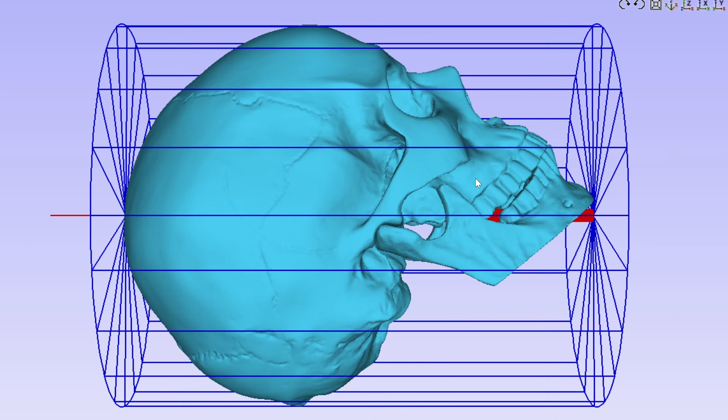The 3 things we're going to teach you in this tutorial are the limits of rotary carving, how to import and position your 3D model,

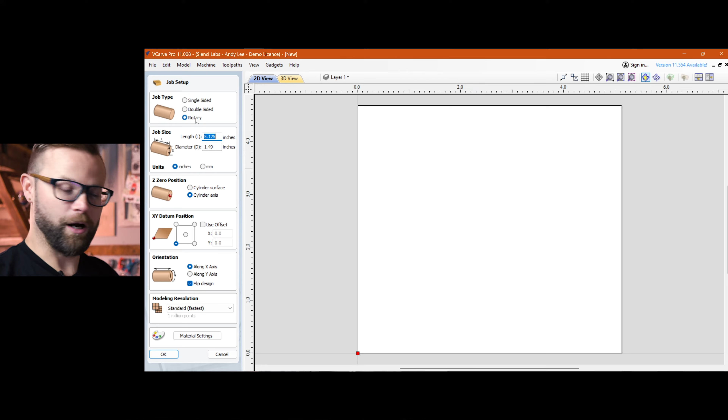First things first, we're going to create a new file. I'm just going to whip through this since you're probably far enough along - even if just starting out with Vortex, you'll have an idea of what's going on. We are going to do rotary carving instead of single or double-sided. That's fairly self-explanatory. The length of your material and your diameter is going to be determined by how big your material is, which is why I have 1.49 in here. When we talk about rotary surfacing, that will really dial that in.

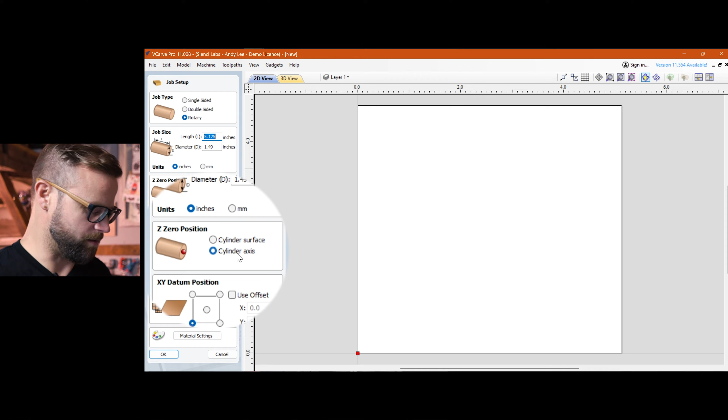Your Z0 position, we recommend it being on the cylinder axis - that's the middle of your material, because if you surface to the outside of it and that changes, you've lost your Z0. Your XY datum, bottom left, is normal. Your orientation is on the X-axis if you set your Vortex up that way, or on the Y-axis if you've set it up that way on your machine. For flip design, just leave it turned on, because if you mess with those settings, it will automatically flip the design for you. So that's document setup in a nutshell.

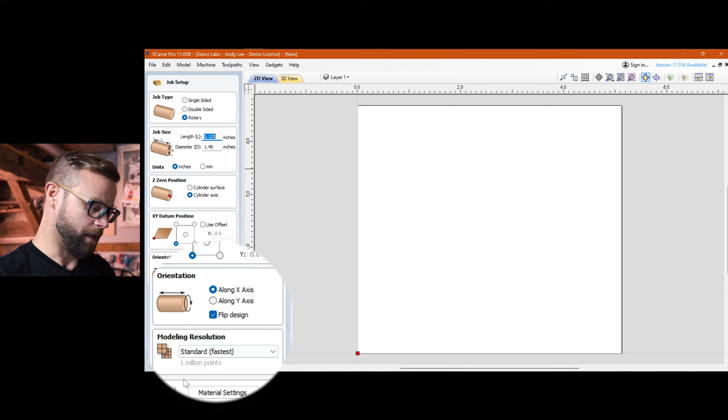Next, we are just going to go to our modeling tab. We are going to import a component like we always do, and as we will provide in the link to all the files, there is a skull file in there. So if you want to follow along with the skull, click on that guy. It's going to bring up the usual 3D import dialog with a couple of key changes.

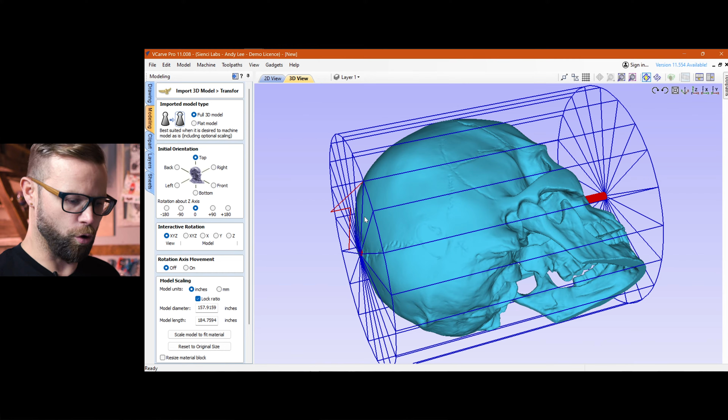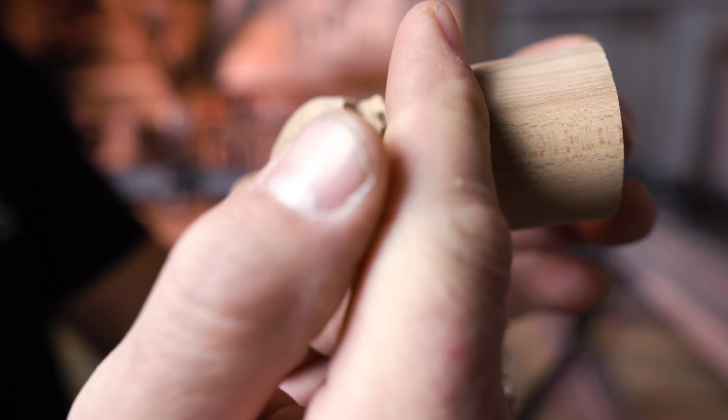And this brings up the first limit of rotary carving that we alluded to in the opening, and that is something called overhangs. It's going to be a little bit tricky to see - there's a little tiny bit underneath the skull, the chin area, that can't get carved out. That's like an overhang, so the rotary axis can't get down and underneath that area. It will only be able to carve straight down.

Limit number 1. The easiest way to fix this or get around it is to just rotate our skull so that it has the best orientation possible for the best carving. So if this was our rotary and it's carving this way, you can see that the skull has been rotated a little bit.

If this came in as it was actually imported, the skull would be like this, and the axis on X would be going right into the forehead or the nose area, and you'd lose all those important details. So the way we're going to get around that, because I don't really care about this side of the chin or the back side of the jaw, is to just rotate it into a position that keeps the good details and hides the ugly ones.

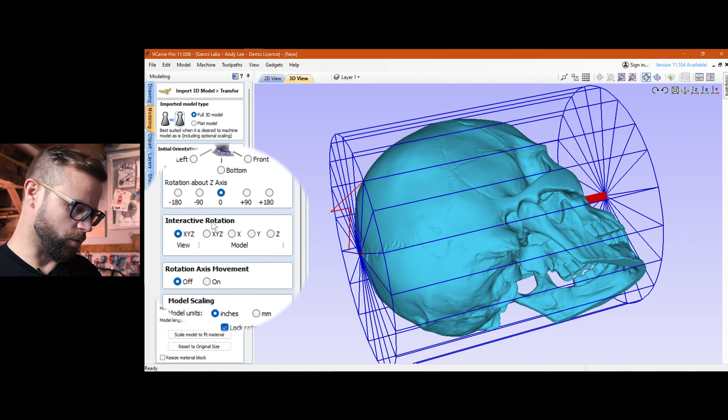We have a full 3D model. Our orientation is still top. We're going to turn our interactive rotation to the Z axis. You can see on our screen here, that's what I was just talking about. The X axis will be going through the nose as it is of the skull and out the back, which the back's fine, but the front you're gonna lose that detail, or you'd have to monkey with it after.

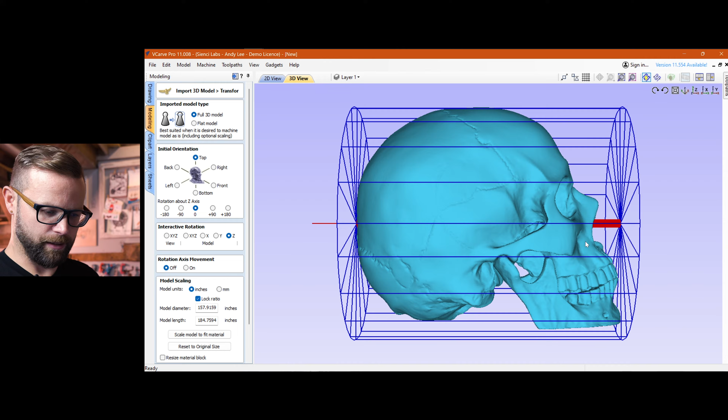By changing the interactive rotation to Z, I can now literally just click on the model and rotate it up, and it will lag a little bit, but you can see it's starting to, look at that! First time I got it. So that red axis there is showing what your X is going to look like, and it's right basically in the same spot as this one is. It's going to go underneath the jaw. We're not going to lose any important details, and we're going to have all the stuff that we do care about front and center.

Done. Wow, that was easy. That never happens. My model units are whatever you're comfortable with.

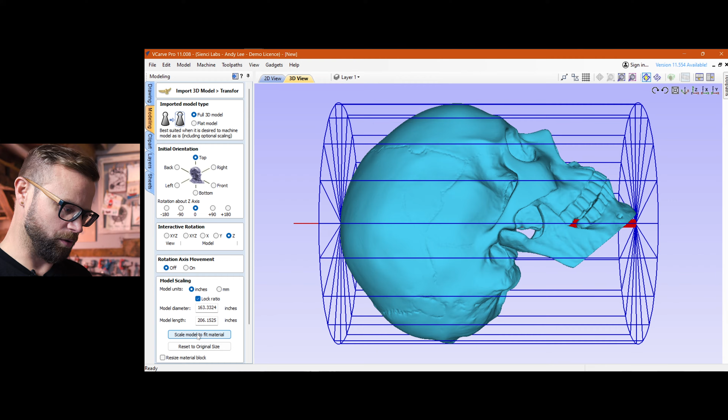The model diameter is obviously incorrect, so we're going to scale our model to fit material. Ta-da! And you can see there's my material length of 5 and 1/8, this guy, and 1.5 inches round ballpark. That is all we needed to do to import and position the 3D model to optimize it for the best carving possible.

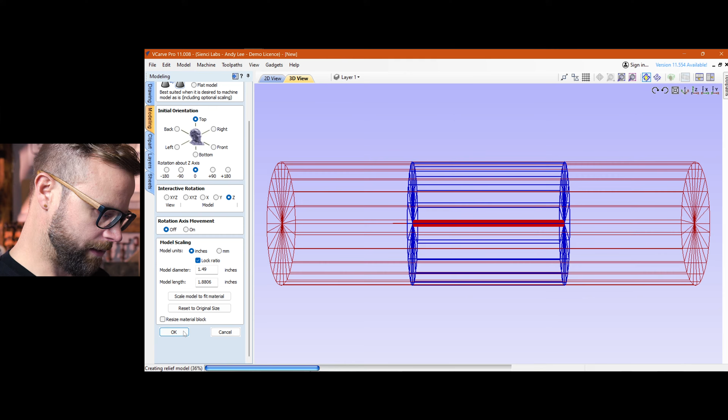We have our model positioned. We're going to hit OK, click, and you'll see that it now imports into 2D space. This is going to look a little bit, not new, but if you did project number 1, you'll already understand that this is basically our cylinder stretched out and unwrapped. It looks a little funky, but you can start to see the bottom of the jaw here. There's the eyes, forehead, and things of that nature.

So the second limitation of rotary carving is that it can't go past the center point of your model. So on this cylinder, it can't go past center because it's going to chop stuff off and it's not going to work. That's just limitation number 2 to be aware of when you're carving these things and rotating and having your position in place.

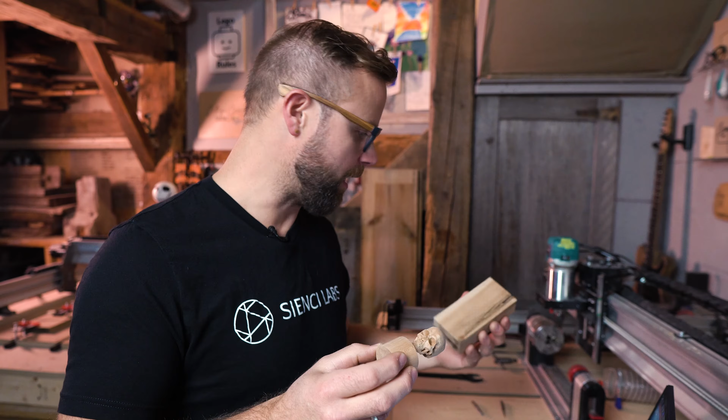So we're actually going to add 3 different tabs to this particular cylinder. I wish I had a working example sitting there, but you can see here's cylinder number 1, tab number 1. We're gonna have tab number 2 way up here, and then we've got a third one up the middle there, and that's so that we can have the skull looking up and elevated a little bit. You don't need this third one, you could just have the model joined right to your bottom tab, but then it's a different dynamic. So depending on your model, for our particular case, we're gonna add 3, and we're gonna do that right now.

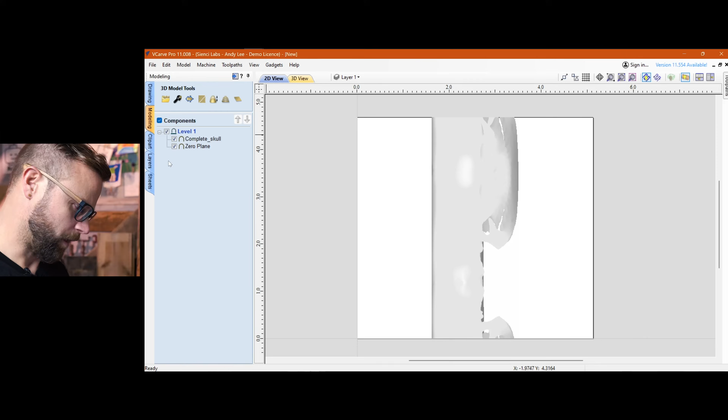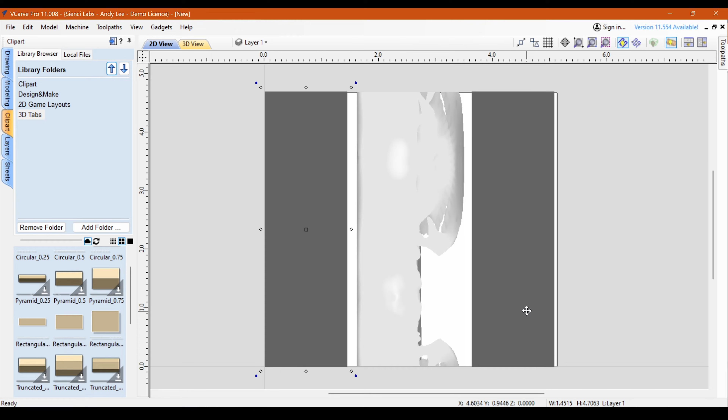So you are going to go to your clip art tab, your 3D tabs, and you're just gonna grab any old rectangle that you want because it doesn't matter. We're gonna mess with the size. You can double click or you can drag and drop. So for the top tab, very simply, we are just going to position it way up there. And if you hold Alt, you'll be able to distort this however you like. So for me, I'm going to stretch it out to there. And then I'm just going to hold Alt and Control and drag one down to the bottom. 2 out of 3 tabs, done, easy peasy.

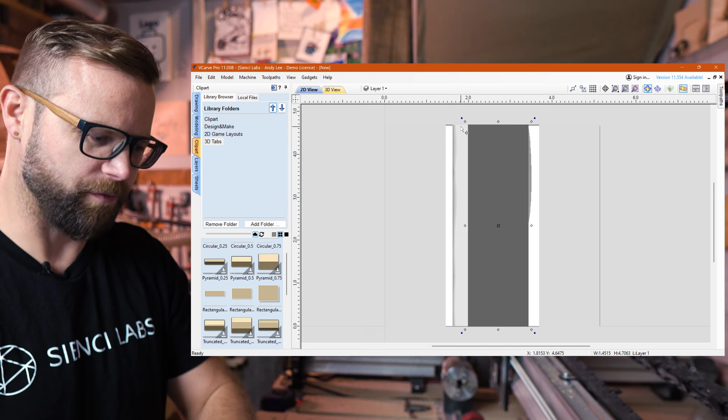This third one's a little bit tricky because it starts to mess with your workspace, but you'll understand it once we go through it. So you can Alt and Control drag again. You have another 3D tab, but this one we're going to cover the entire document work size with. It's going to block all your stuff and you won't be able to see, but you'll understand in just a second why we're doing it.

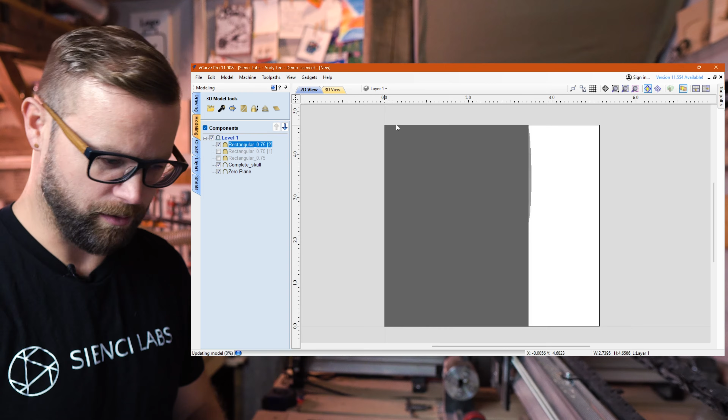Tip number one: if you go over to your modeling tab, the deselected tabs we've already created are in the way. You can check them off to see your whole workspace. Now we're going to take that third tab, hold Alt so we can distort it, and drag it across the entire work surface.

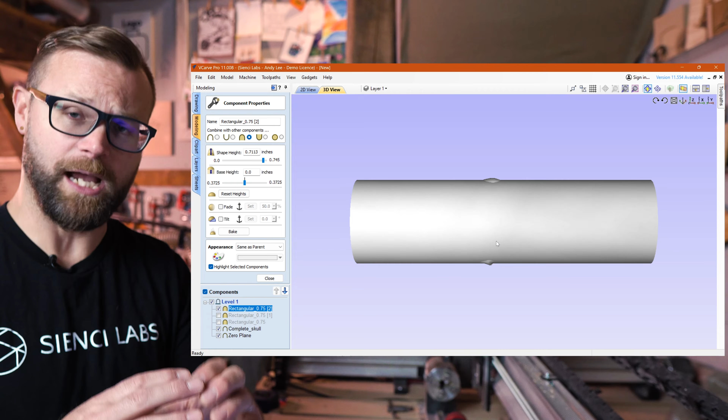Now you're saying, Scott, I'm just looking at a gray box instead of my model - yes, you are. So double click on that new tab, go to your 3D view, change your view, and you'll see that tab is the size of your stock. That's not helpful because it's burying your model in it.

But if you just change your shape height, right here, using the arrows or your mouse, you'll start to see your model - come on, show yourself. Aha! You can start to see that your model pops out.

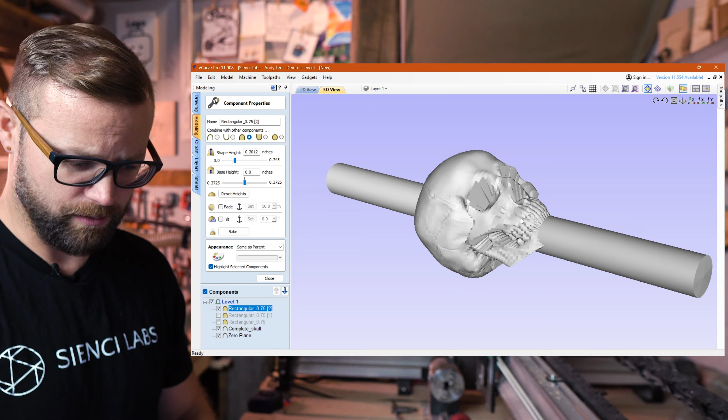So you set that as thick as you want so it's not distorting anything, not in the way. Right about there is pretty good. It's still going to get a little bit of that jawline, so I'm going to leave it there because honestly, I'm not that worried about it - I know I can sand it out if I want to.

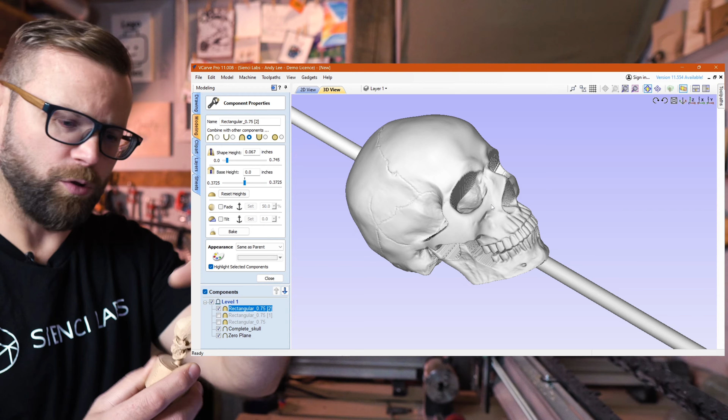If you're not happy with your model position at this point, if you want it more rotated or want to change it, you can always go back to your modeling tab. Right click on your skull and re-import it, changing the orientation just like you did the first time. Nothing gets lost, you're just changing it.

So let's actually do that because I don't like the way that looks. Go back to re-import, change the interactive to Z again, and I'm going to zoom in just a little bit because I don't want it to be quite...

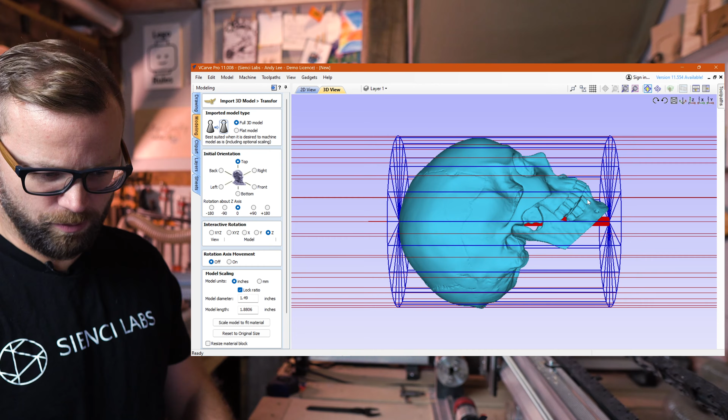So again, this is where those overhangs are going to be a factor. If you go to a side view, there will be a line that comes straight down off of the bottom of that jaw.

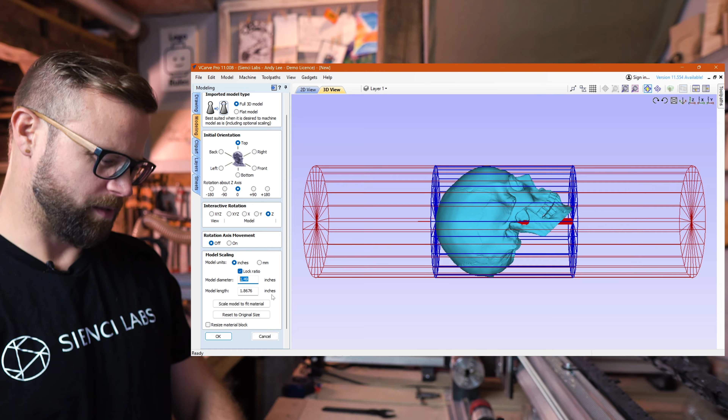I'm okay with it. Scale is incorrect, so we'll hit scale model to fit material again. And if I'm being honest, I'm going to make that a little bit smaller - I didn't do that the first time, but just a tiny bit smaller so it doesn't catch the edge of the material. I probably should have said that the first time, sorry.

Here we are, back in our 3D space, and you can see that overhang I was just talking about. You're going to get a little bit of this because the bit can't carve down through there, but I'm okay with how that looks - it's not going to hurt the aesthetic.

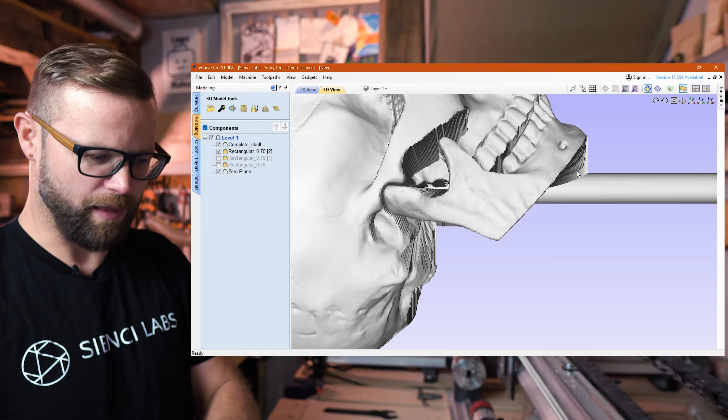That's it for 3D tabs. Now that we have our 3D tabs in here and our model's positioned the way we like it, you can change the height of those 3D tabs if you want to, but the way I'm going to set up the model with the toolpaths, we're not even going to actually carve those out. So they'll be left in place when it's carving, which is fantastic because it doesn't waste time carving. And we're going to talk about toolpaths right now.

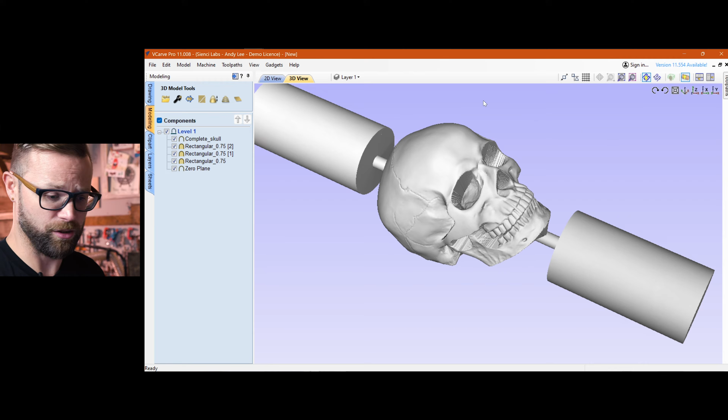So this is actually a really good segue. Fire up our tab, we'll pin it in place. We are going to use a quarter inch upcut to do the rotary surfacing as well as the rough pass on the skull. And then we're going to use a quarter inch tapered ball nose to do the fine details.

If you're not familiar with roughing and finishing passes, the roughing pass will just use a bigger bit. It'll remove more material faster so you can get the final pass done sooner and easier. It basically saves wear and tear on your bits and saves time overall.

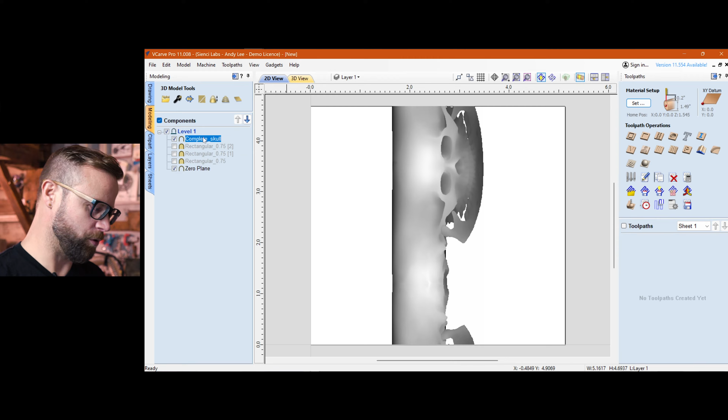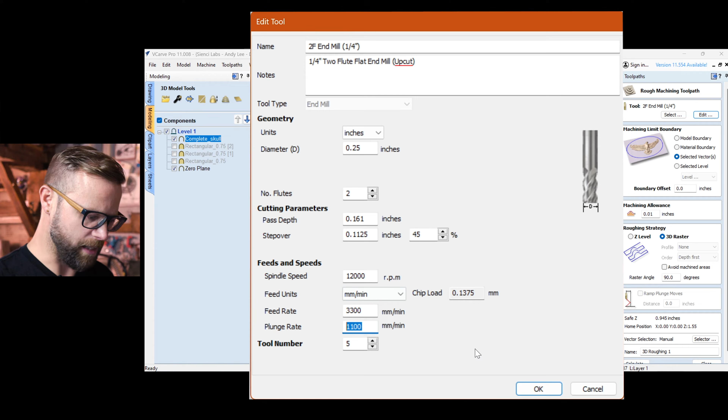I'll show you my settings. Here they are. The only thing I really tweaked was my feed and my plunge rate. Everything else I left as is, and it chewed through this fairly quickly. So we'll leave those as is. I'm good with that. Boom. Boundary offset, make sure that's set to 0 because that can mess with your stuff.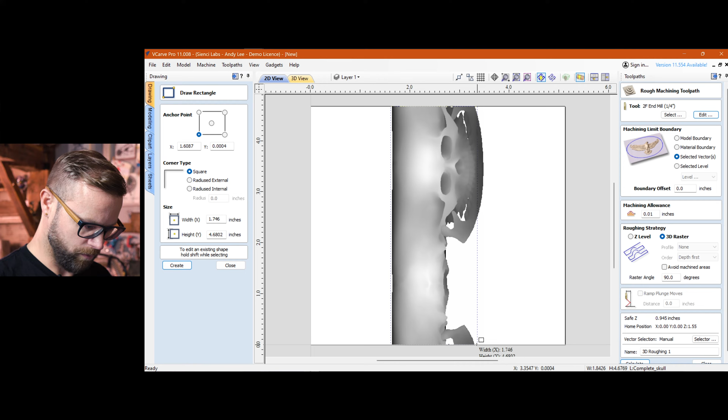This is where I said earlier, I'm not going to worry about carving out my tabs because I'm going to use the wonderful selected vector. So I'm just going to draw a simple rectangle, just around the shape of the skull. Get over there, just past, just past, just past. The reason I'm doing this is, while this is doing its carving, instead of carving these out and messing with this and wasting my time, I'm basically going to tell it, only carve what's in between here and here. It's going to save time and it doesn't change the final outcome, so I'm all about saving time.

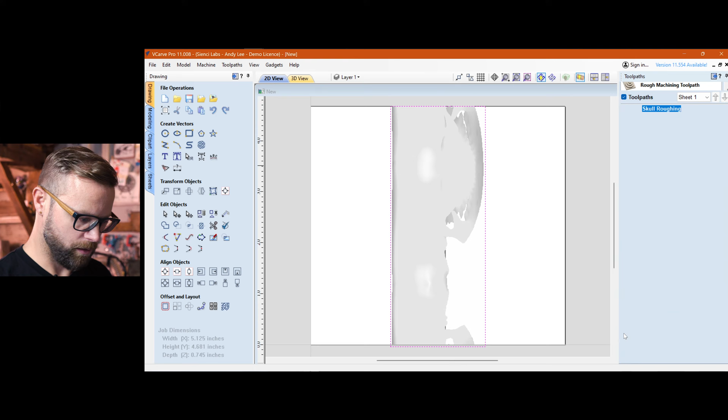You have your model selected. You are going to hit selected vector. You are going to change your roughing strategy to 3D raster and change your raster angle to either 90 or 270. That just makes sure it's carving properly and making everything look smooth and fancy. I'm going to change the name to skull roughing, and then hit calculate. Then we can preview our selected toolpath and you will see the rough formation of our skull. Yay.

There it is. So you can see it doesn't touch the tabs. It only hits that stuff in between that selected vector. It saves time. That's marvelous. We'll go back to our 2D view.

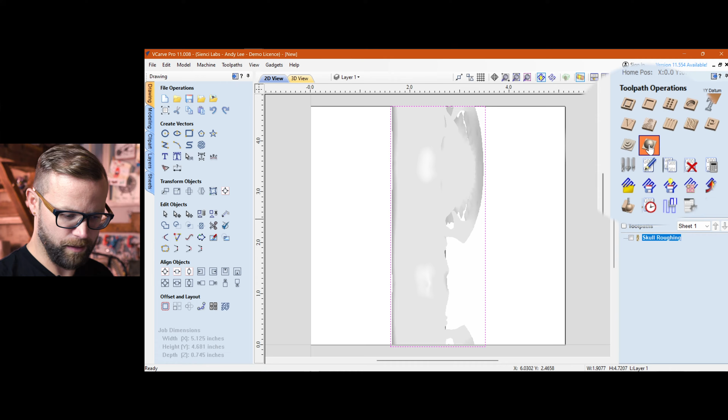We'll keep everything selected the way it is, and we will go and make a 3D finishing toolpath. We use the 1/4 inch tapered ball nose, just like I said. I'll show you my settings there too. And again, the feed and speed rate - this is a different calculation method than for normal carving.

So we're recommending just leaving these settings as they are. I've literally carved 2 or 3 of these out now. They work just fine and dandy on hardwood or softwood. So if you want to mess with them, go ahead, but what we have in here will work just fine.

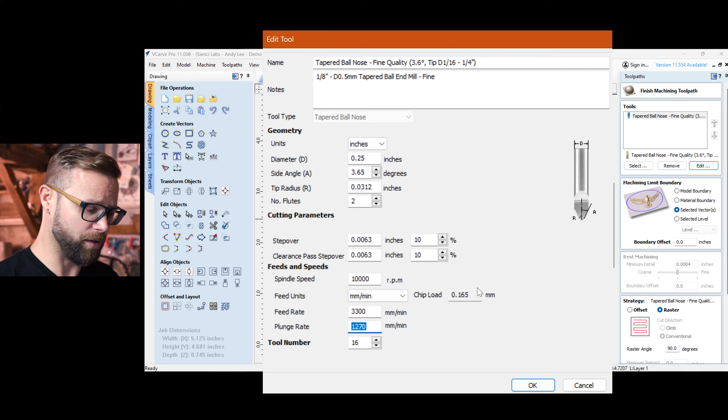So we're going to say okay, and we're still going to use our selected vector. Our boundary offset is still going to be 0. Our raster is at 90, and we are going to call this skull finish. We are going to hit calculate. This one's going to take a little tiny bit longer. Then we will preview that selected toolpath and you'll see it scribbling along and doing its thing.

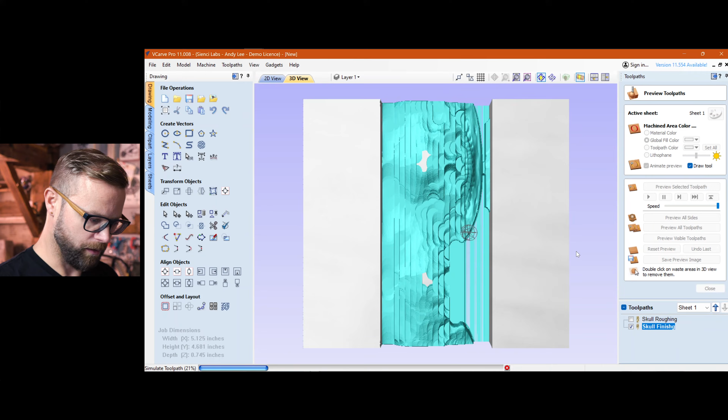Ta-da! Finishing toolpath. Now, because there's a little more information here, you'll see that maybe it takes a second longer to generate that preview. Overall, not a big deal.

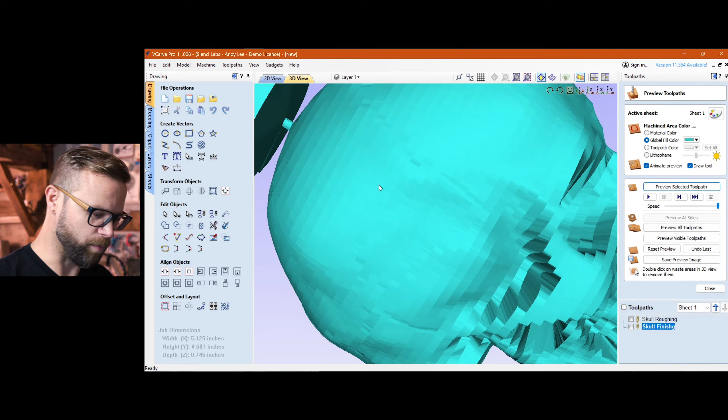Now, I'm already seeing an issue though, where my tab is - I'm gonna have to fix that because that looks far too skinny to me and I think that's going to break. Maybe it's not. Actually, I have a file open already, so I'm just gonna check that one because why not? So I'm gonna preview these two and see what happens, just to double check because I've already done this project and I want to make sure I'm giving you guys good information.

Huh? That's not what it's supposed to look like. Alrighty, so the reason my preview is messed up, and this is 100% user error, was I had all of my tabs turned off. It's gonna make a difference.

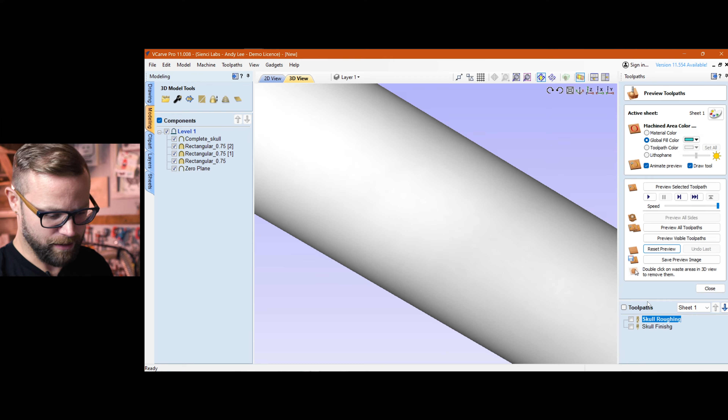I'm going to recalculate just to make sure everybody's happy. Nothing else is going to change, however my tabs are going to do what they're supposed to do. So here we go, and I just realized that I spelled finishing wrong. Finish - whew, oh, because I had just finished. There we go. Well, it's spelled right now.

Whew, these short tutorials are killing me. And now we are going to preview. You know what? I'll just do the roughing one so you can see what's going on. Preview the selected one.

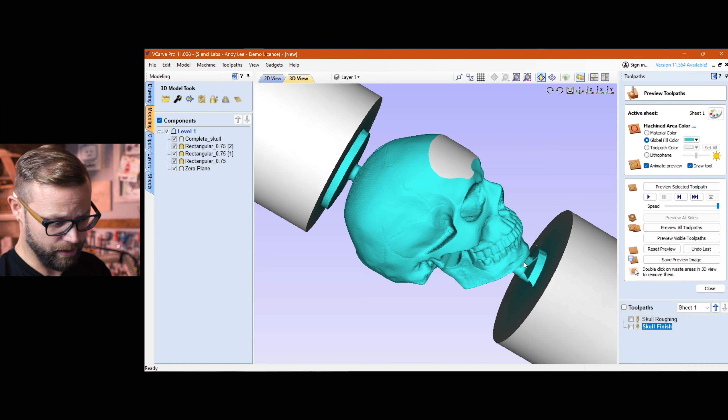Again, tabs at the top and the bottom are going to be great. There we go. That looks basically the same, but the finish pass is now going to look much better than it did. It's going to look the same, but that little spindle at the top will not be - aha, it's not so skinny. It's going to be chunky, and it's going to hold it on there. It's going to hold it on here, and that's it for your creation of toolpaths.

We're happy with our toolpaths. Our settings are dialed in. This is hopefully easy to follow along with. There's not really a lot of crazy settings going on. So we're just going to go over and we are going to save our toolpaths.

If you have not downloaded the Vortex post-processor, we'll put a link in the description. Make sure you get that because otherwise you literally can't use this thing. That's the only difference between a normal carving job and the rotary is that your post-processor will be, instead of Grbl, whichever one you like, it's going to be Vortex A-axis right there. Click on it. Same thing, visible toolpaths to one file.

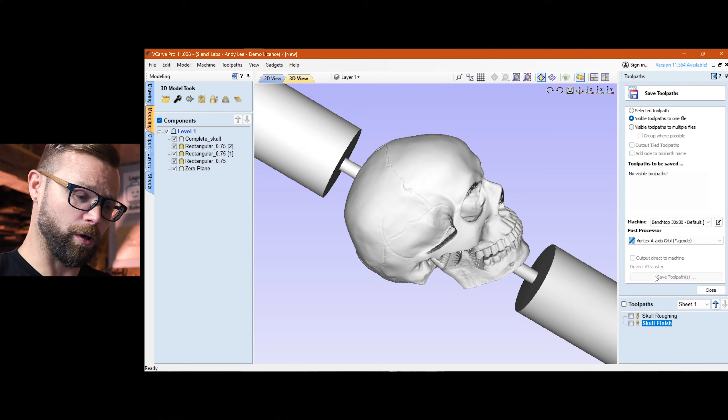Johan does talk about tool changes in his written tutorial. I'm not going to go there. I'm keeping it simple. So I'm literally going to select my roughing pass. I'm going to save it to my gcode folder, and they're already in there. And Louis is going to yell at me that I don't actually hit save.

So I'm going to make a new folder. I'm going to call it X. And I'm going to save my skull roughing in there. And I'm going to deselect and save my skull finish in the same folder. So you actually see me click save because we don't want people thinking that we're not actually clicking the button. We're going to hit close.

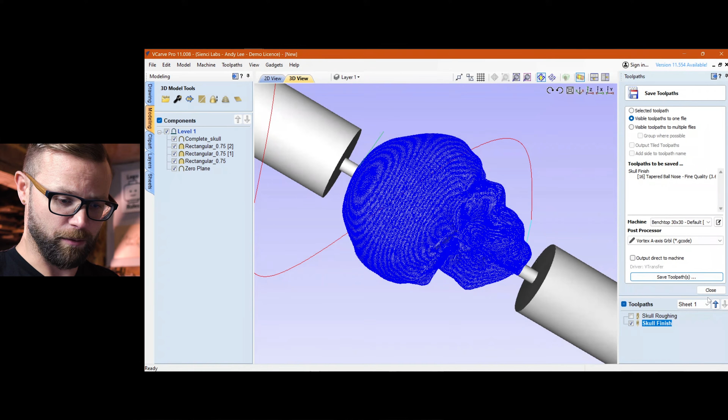We're going to save our file because nobody likes losing their file. It's going to go up here and I will call this skull tutorial. And I spelled it right. Hit enter. VCarve is done. It's that easy. We are going to start loading our files in gSender and doing that in just a quick second, but before we do that, we have to turn this rectangle into a cylinder.

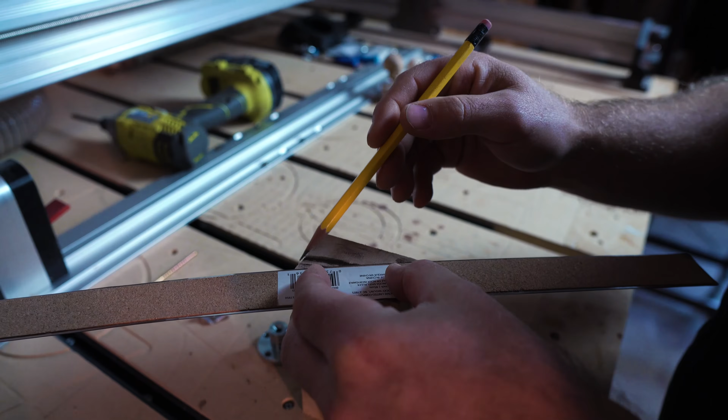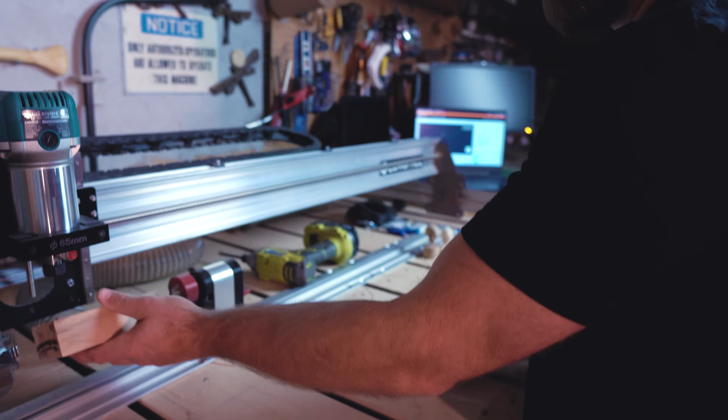So the easy peasy way of doing that is to find the corners of your piece, draw a line from corner to opposite corner again. There we go. You have your center point now, right about there. Because this piece of material is obviously too big to fit in this chuck set of jaws or the other one, we're going to use this handy dandy little plate attachment.

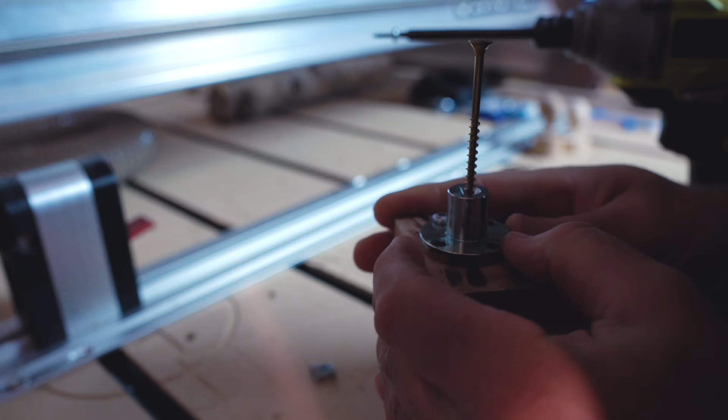The easiest way to do this, and again, you don't need to do this, is you can just drop a screw through the middle, line it up to the middle of your X, and that tells you where the center of this needs to be. I'm not gonna lie, I don't do that very often. I eyeball it because this thing is gonna turn that into what we need it to be. Drop in a couple of screws. If you see it come off center, then just kind of get it close enough. There we go. Yeah, that can go away.

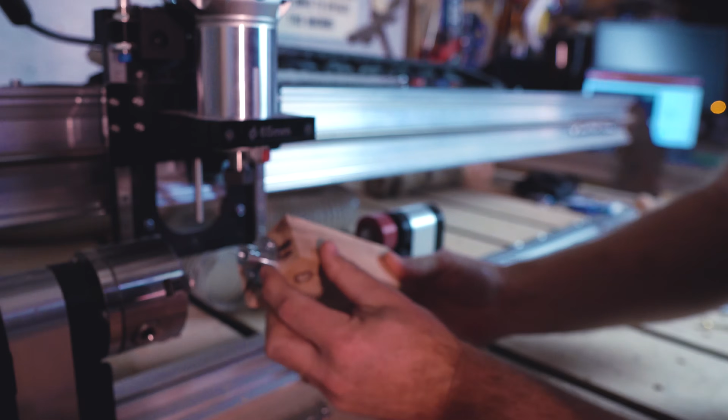This can come out. And now we're just going to lock this into the jaws on our Vortex. So you make sure that your screws that you've just put in are not in line, right? You don't want them to be in line like that. You're gonna slide them over, grab your chuck, and give a little crank, and ta-da! You've got your jaws locked in, tightened down.

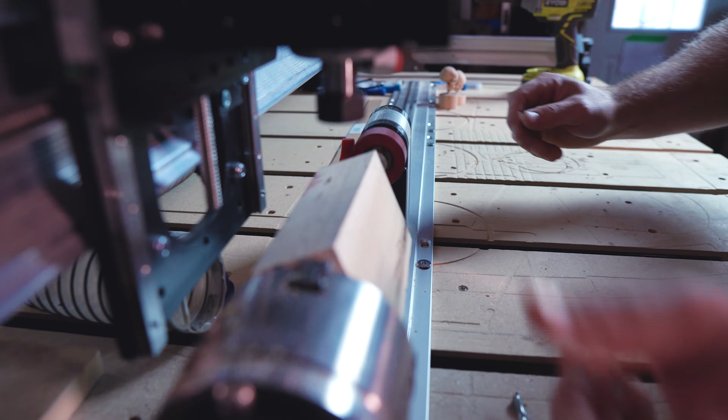We're gonna slide our tailstock over. Once it's touching the piece of wood over here, you can lock your lever down on this side. Give it a couple of cranks, maybe a couple more so I don't show that I gouged the metal last week when I made a mistake. Hand tighten, and we're good to go.

Before we get into actually carving this and doing the rotary surfacing, you can see right now my A axis has the ability to rotate freely. That is not necessarily an issue, but because we're going to be doing a bit change, if for some reason your chuck turns while you're doing your bit change, you've basically lost your ability to really, well, yes, you can reset your zero on this. I'm going to give you a tip about, it's called turning on the holding current.

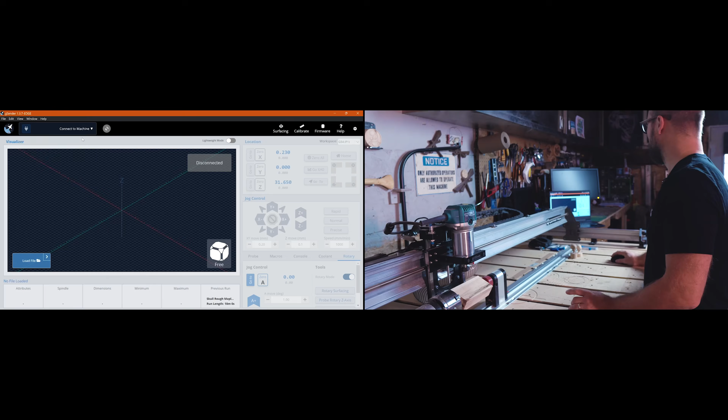We're going to connect to our machine, and we are using gSender Edge here. Remember that when you're using the rotary, you need to be using Edge. So I'm just going to unlock my machine because nothing's going on. I don't need to worry about homing right now.

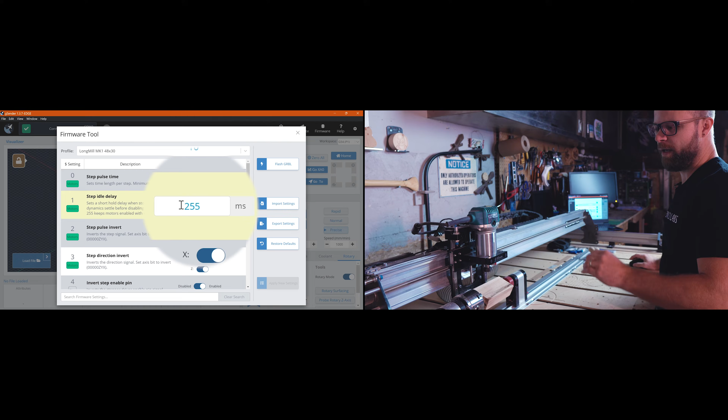You go to your firmware and you would change this number, $1, the step idle delay. That's defaulted at 100. You turn that to 255, and that is going to stop the A axis from being able to turn freely. You can see. So it's called turning on your holding current.

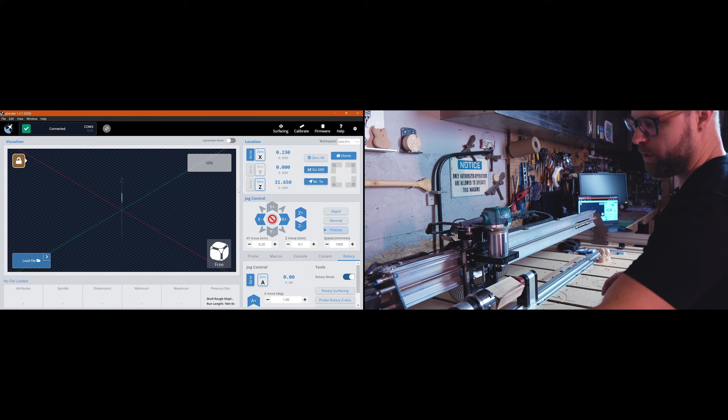Super handy feature because now when you do your tool change, if something does happen, you can't move this and it stays in place. The only thing to know about is when you're switching between your Y and your A, you need to power down your machine if you have this option turned on. So just notice that, pay attention for that. It is in the other tutorial videos too, in those resources. So there we go, tip number 1.

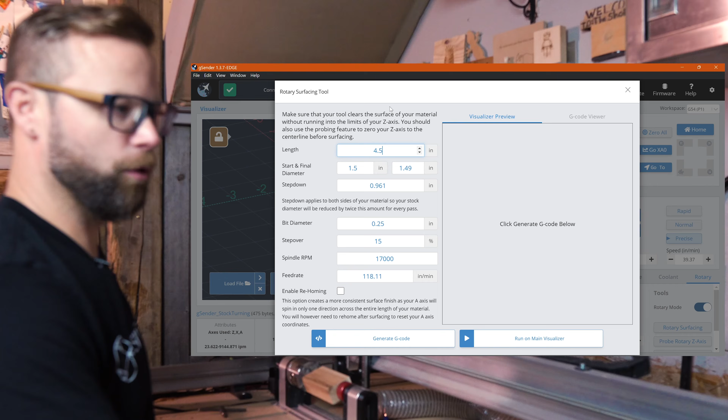We're going to go over here to the Rotary tab, and we are going to go to Rotary Surfacing right there. And it's going to bring up this wonderful little prompt. Now, yes, we are going to have to put our bit in at some point and do a 0. The order doesn't matter. You're gonna have to do both, so it's up to you what you wanna do.

Again, another little tip or hint, my material is 5 1/8 long. The issue with that, if I tell it 5 1/8, is it's gonna carve right from that leftmost edge, and there's screws going through. I don't wanna hit the plate that's holding it in, so I'm purposely going to offset by a dimension. That dimension's up to you and your piece and what you're comfortable with. I was smart enough, I said, you know what? If I go 4.5 inches over from this edge back to here, then it will start carving there. Yes, it's gonna leave a little chunk, but that's kind of safety, and I'm okay with that. So I'm telling it 4.5.

I'm telling it that my start dimension is 2.5. My finished dimension I want to be 1.49 because I want it to be just a little bit under my smallest dimension, which is 1.5. Step down doesn't really matter. You can leave the defaults, quite honestly, is basically what I'm saying with that. Put in your bit diameter, whichever you're using. Your step over is just like a normal carve where you are moving over in between passes.

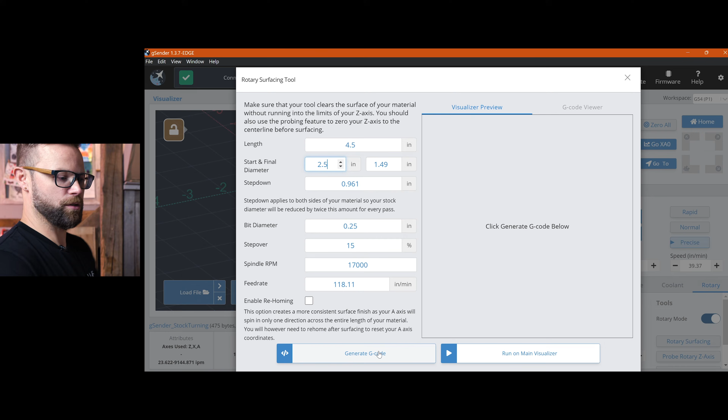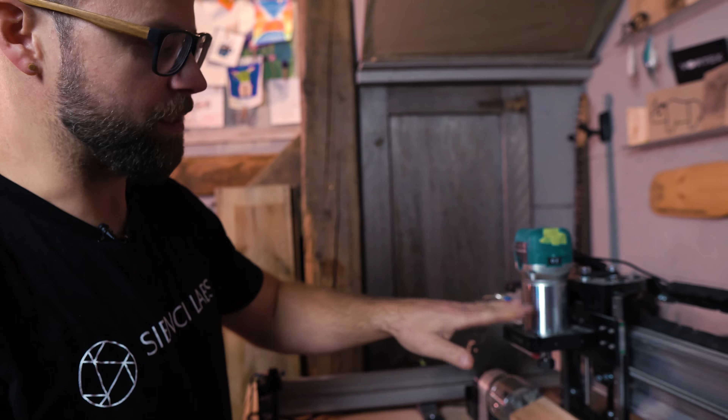15% is fantastic. You're going to hit generate gcode right there. You'll see it generate it. You'll hit run on main visualizer, and you'll see that there's your gcode. And now we just have to zero out our bit. For this surfacing, we are using that 1/4 inch 2-flute upcut bit. Make sure you raise your Z axis basically as high as it will go. Nothing out of the ordinary there.

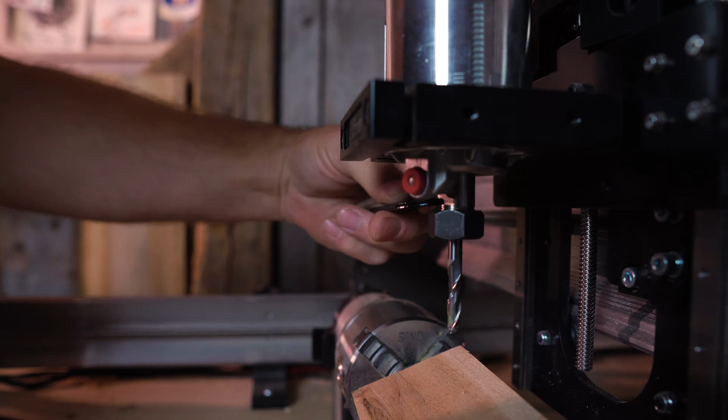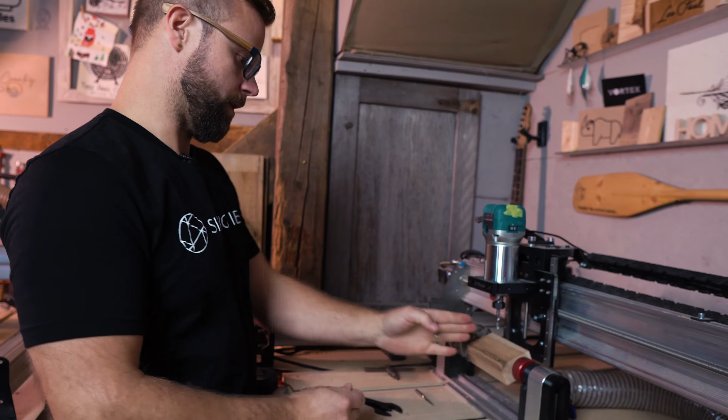Slide your bit in, push your red button, turn it to hand tighten, use your wrenches, and you are tight. Now we have to zero this. We've already zeroed our Y because we did that when we set up our vortex. Our X is easy enough just to move it to where we want it to be. And then we are going to plug in our banana connector there. We're going to put on our magnet, and we are going to probe rotary Z axis. That's what we're doing this time. I forgot.

Now we're going to probe our Z height of our bit against our chuck. Huge word of warning, caution, because I literally just did this. Unlike your auto zero touch plate, when you hit the probe rotary Z axis on this, it's not going to dummy check it. It's not going to ask you for continuity. It will just start moving. So I literally hit it and it started moving and I had to stop. So we're going to move over on our X axis.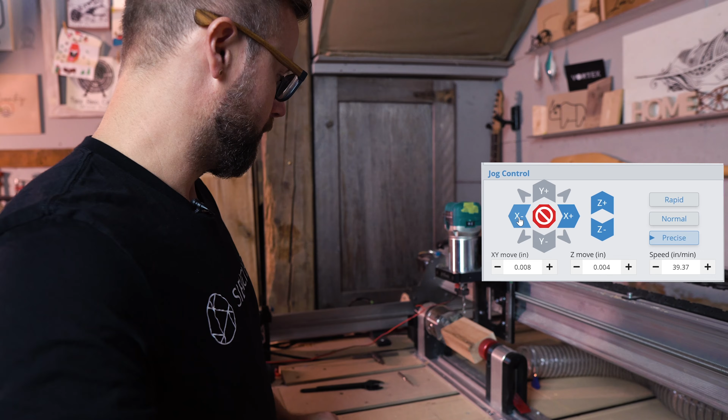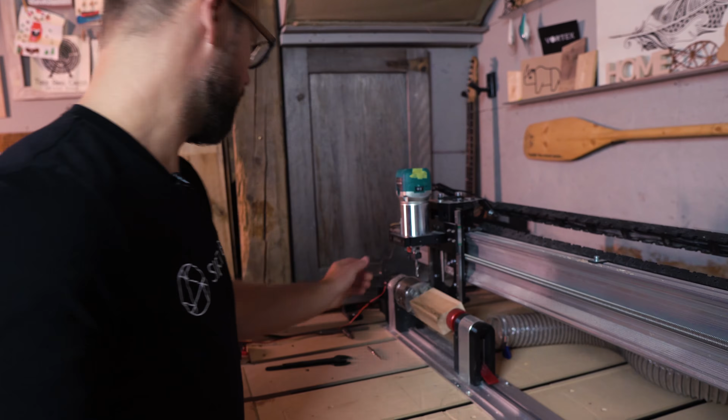Till your bit is hovering just over top of your chuck. Make sure that your magnet is solid, your banana connector's in, make sure your wires are all tight, and then you are going to hit that probe rotary Z axis over there, and it's automatically going to test it out for you. Wonderful. That easy, that simple. Disconnect, disconnect, hang it where you like to. Y is good, Z's good. All we have to do is tell it where X is going to be, so this is about as simple as it gets. Move it back over.

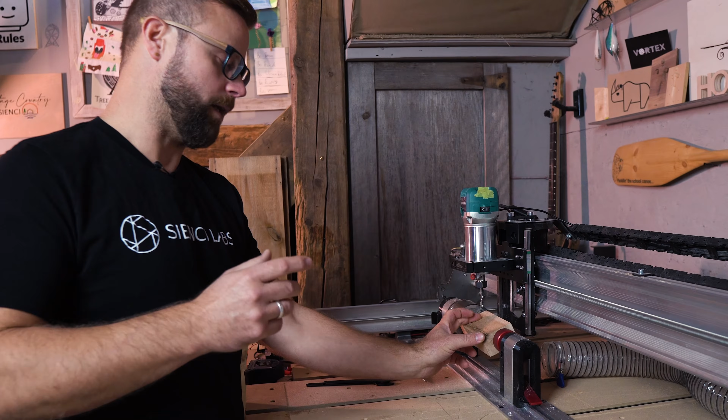Another, again, word of caution. Because you've dropped some screws in here, don't put it right on the edge of your wood, and if you are going to, you might run into the screws. I move mine over purposely, but I also calculate that offset with my file size in vCarve so that I don't have to worry about running over and hitting my chuck stop back here, which I already did last week, and that error's right back there. It's hidden so no one sees it.

So we're gonna zero our X, and now we can basically hit start job, and this thing's gonna start spinning. It'll go slow at first just to get it eased in, and then it will go to town and carve this whole thing out, and it'll be wonderful, and we'll have a cylinder when we're done.

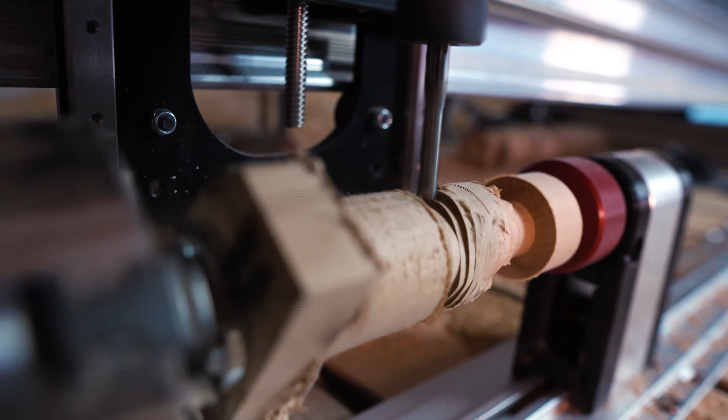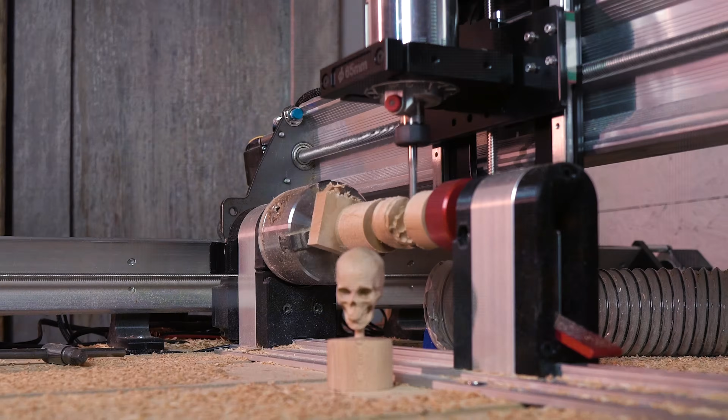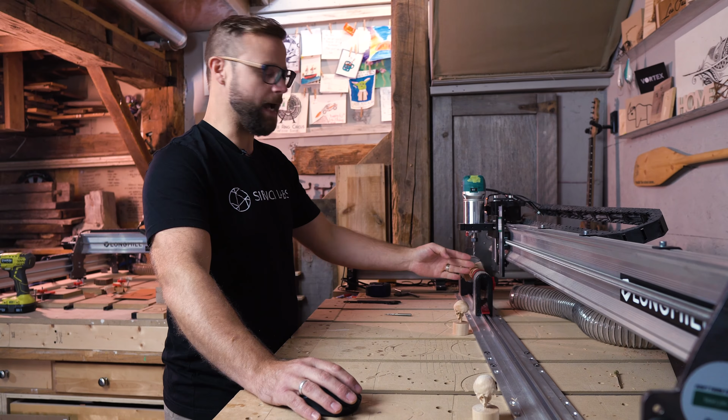Roughing pass is done. Didn't take very long at all. We are going to change over to our tapered ball nose for our finishing pass. Sometimes these bits are a little bit long, so you may find that you have to move it over on your X axis in order to slide it into the collet. So I'm gonna move it over on X.

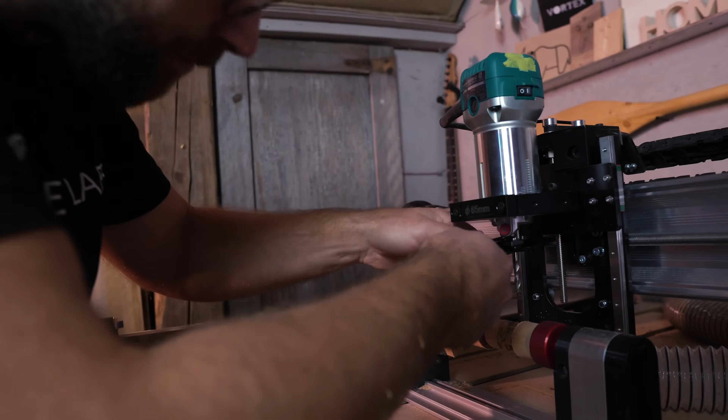There's a little gap right here in the model, so that should bode well for being able to get it out. Oh yeah. Should do it. There we go. And because, again, this tapered ball nose is a little bit longer, but by moving it over just a little bit on your X, you're not losing your 0 on X, which is the easy part of it. It's just moving it over.

And apparently, this bit is not being cooperative. Wow. Well, let's see if there's something in there. Oh, there was dust in there. Sneaky, sneaky. There we go. Now it should cooperate like that. Slide it up about as much as you can because there's not a lot of room on my specific machine. Tighten it down. We're gonna move it back over on X. I'm not using the tools.

Thank you to my videographer for reminding me that you need to use the wrenches because, you know, I've only carved like a million things and still managed to forget.

Remembering to bring your bit over your chuck, making sure that you have your banana connector, your magnet on, and as soon as you hit probe rotary Z right down here, it's going to start probing. So make sure you're ready for it and it's in the right position. It is. We're gonna check it. Bing, bong. And our Z is done. It was that simple for that bit change. That's like the easiest thing ever.

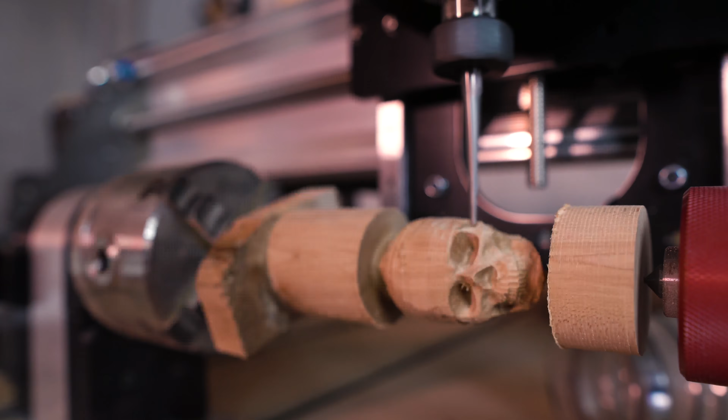Here's Scully Jr., and you may or may not be able to tell, but right here on the skull and right here on the skull, I didn't quite scale my model down quite enough, and it's still kind of like the outside of the cylinder that we rough carved. Scully Sr. here, however, has a very nice cranial outline and is much better. So just a word to the wise, check your previews, make sure your dimensions are proper, because that's a learning from me kind of thing.

A couple of new things to remember, a couple of different settings to tweak, but overall rotary carving isn't all that different from good old flat old school carving. So hopefully this tutorial plus the written one took some of the uncertainty out of rotary carving if you weren't sure, and now you're happy to get out there and start turning your own projects. Turning. Get it? Wah, wah.

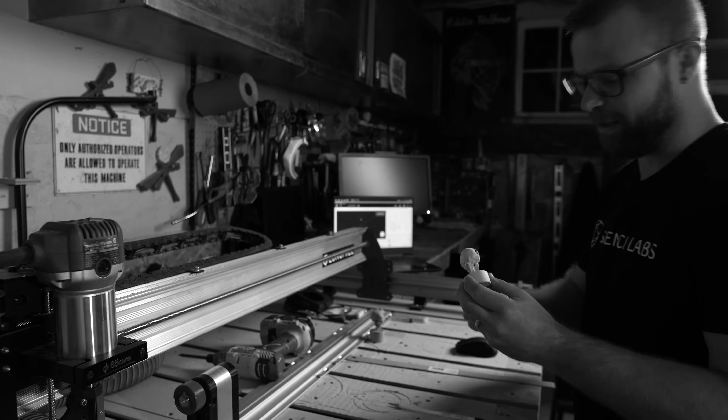Alrighty, so do you know Matthew McConaughey apparently was going bald and found some secret shampoo that worked for him? Well, the good news is I know you're not going to put that on the internet. Oh, man.